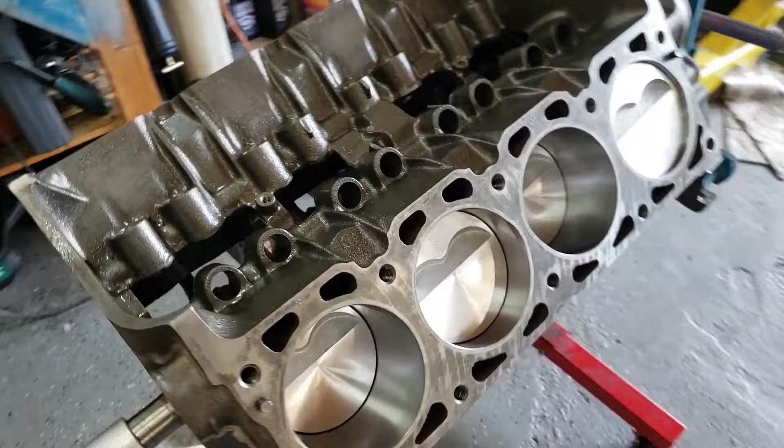Today we got Bonnie on the lift and we're going to do a few modifications. Maybe you've noticed on our Facebook page, we've been racing the Bonneville. We've been bracket racing it and it's very consistently slow, but it's very consistent. It basically runs about 18 flat in the quarter mile at 75, 76 miles an hour.

Like I stated before, it looks like it's got 2.41 rear gears based on just some crude math of turning the drive shaft. It does have that Metric 200 3-speed automatic in it. And I mean, the car runs really good. It's very consistent. It's actually won the free bracket race on ladies' night on a Wednesday, guys against girls. It's been to the semifinal round several times on a Wednesday night.

It sucks because I kind of haven't really raced the Trans Am lately. Not that there's anything wrong with the Trans Am, it's so much fun running the Bonneville right now, and it's just a no-brainer. But don't worry, the Trans Am will be out at the drag strip shortly. We've got some other mods planned for that.

But anyway, what we're doing with the Bonneville today, the car didn't have any kind of gauges in it, so I do want to put an oil pressure gauge and a coolant temp gauge in it just for peace of mind, see what's going on with the car. Second thing is that we did change the exhaust. We removed the stock catalytic converter and put on the homemade exhaust out of spare parts that I had laying around. One of them being a 2.5-inch MagnaFlow muffler.

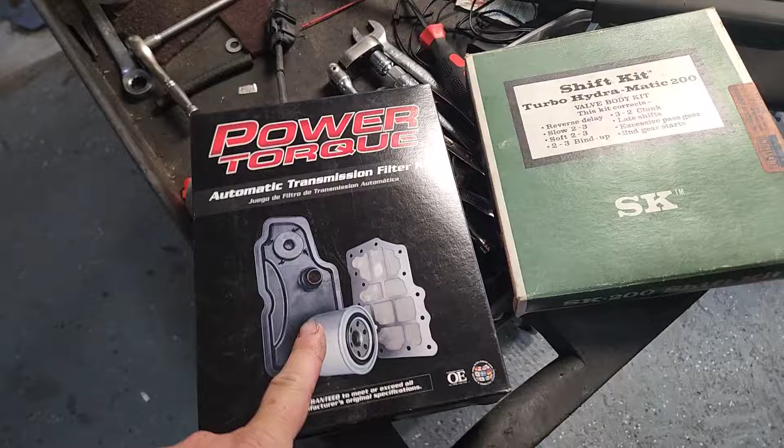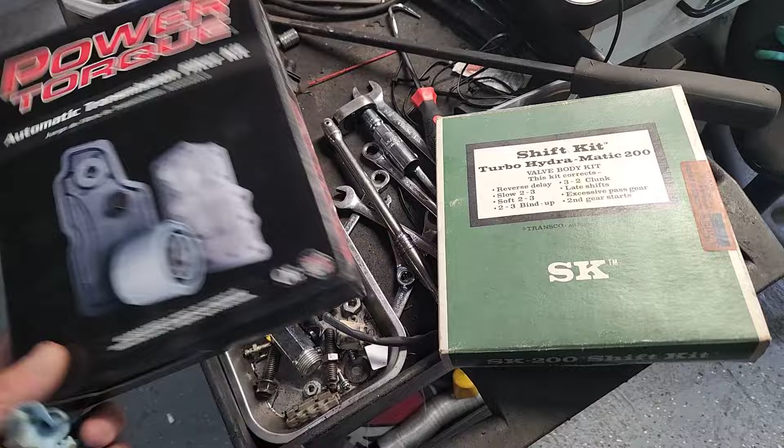So this is what I picked up. This was from my local auto parts store. Actually, they didn't have one, and their warehouse didn't have one either. They actually had sourced this from another store to get it, but this is just basically a filter and a pan gasket. And then this is what I bought off of eBay.

This is a Turbo Hydramatic 200 valve body kit, and these are the things that it corrects. It's made by Transgo. I like Transgo stuff. I like their stuff as far as shift kits and valve body recalibration kits and stuff like that. I don't even know what it says here. What does that say? Oh, just Lemco. Cleveland, Ohio. Must be where it was made, I'm assuming.

Fits 76 to 78 THM 200, Turbo Hydramatic 200. The reason I wanted this one specifically, 76 to 78, is because in 1979 the Metric transmission got a lockup torque converter, and I wasn't sure if it would be the same. This one being a 77 is a non-lockup. I didn't know if a kit specifically for a lockup would work in a non-lockup trans. So that's why I went with this.

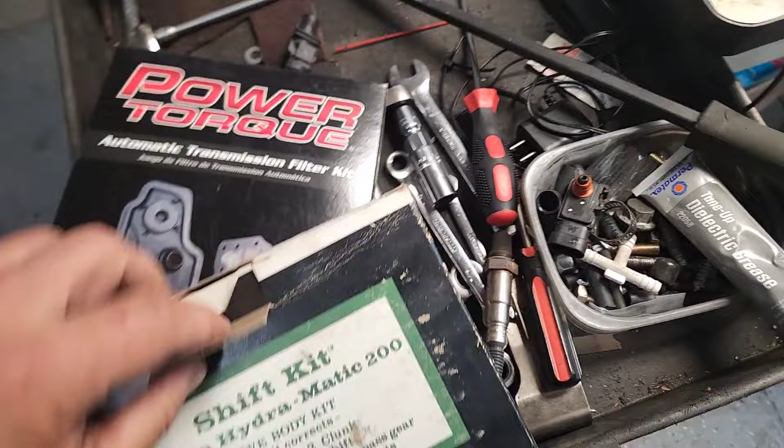And then it has parts inside of it. It's pretty old school. Oh, there's a separator plate. So yeah, the valve body is going to be coming out. So let's see what we got underneath here.

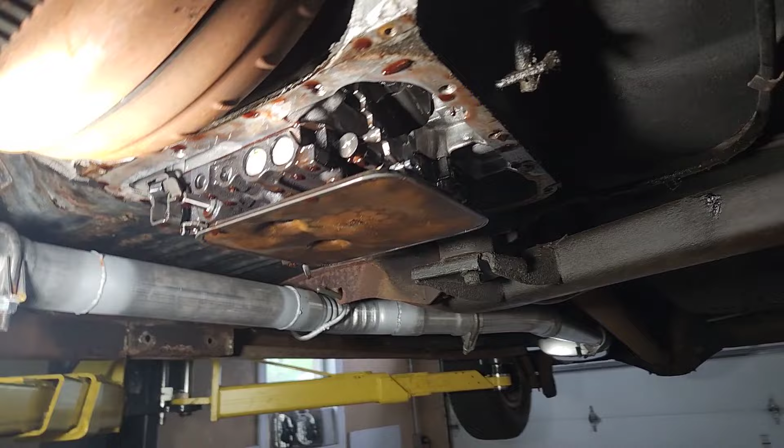So I got the pan off, and I have a suspicion that maybe this fluid was never changed. I mean, the car's only got 52,000 miles on it. Little bit of material on the filter, but not bad. Fluid was not bad, wasn't burned or anything like that. The pan itself, there is a little material on the bottom there.

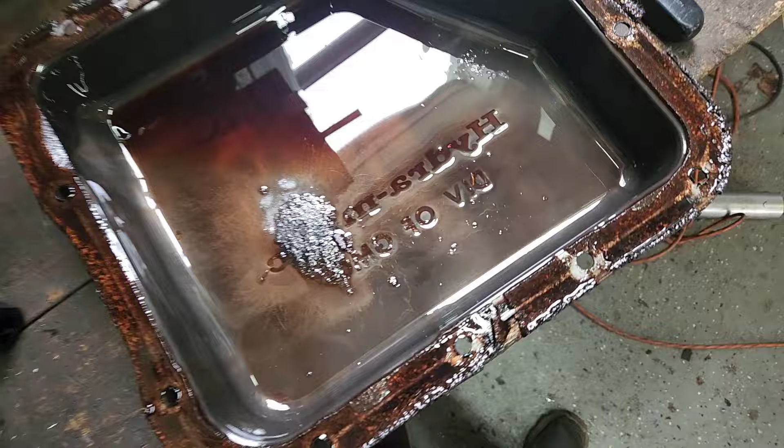Hopefully everything is going to be okay, because these Metrics are known for, I believe, burning out the reverse band and then they don't want to back up. But this one's been shifting just fine. It's not the firmest thing in the world to shift. With me racing the car, even though we're not making a ton of power, I still wanted to try to save the transmission from any kind of complete destruction.

And I do have another Metric trans just in case that's got 56,000 miles, but it is an 81 that has a lockup converter. So I do have a backup. Usually a Turbo 350 bolts right into place. It is pretty much a direct swap for a Metric, but I don't really want to go there if I don't have to.

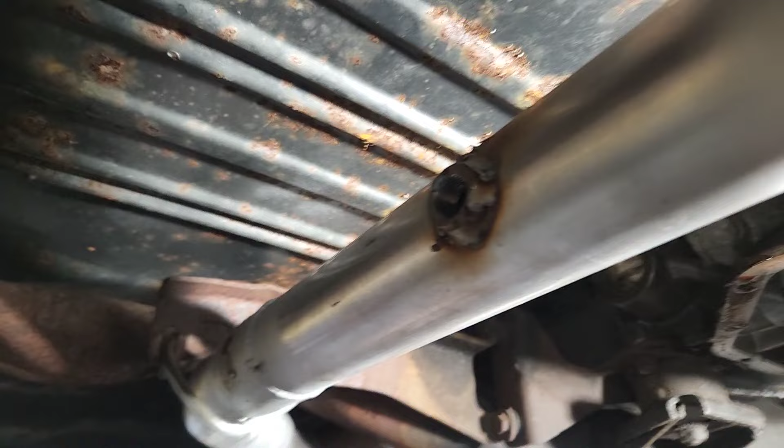So as you can see, we got the exhaust right there. We did put an oxygen sensor bung in it just now. We still have to screw in the oxygen sensor. And of course the awesome MagnaFlow muffler that is prettier than the car. All right, let's get to work. We'll get this valve body down and we'll see what's involved with this kit.

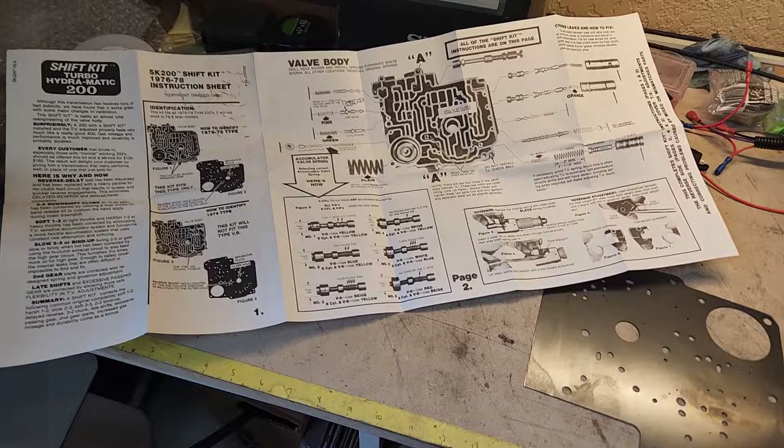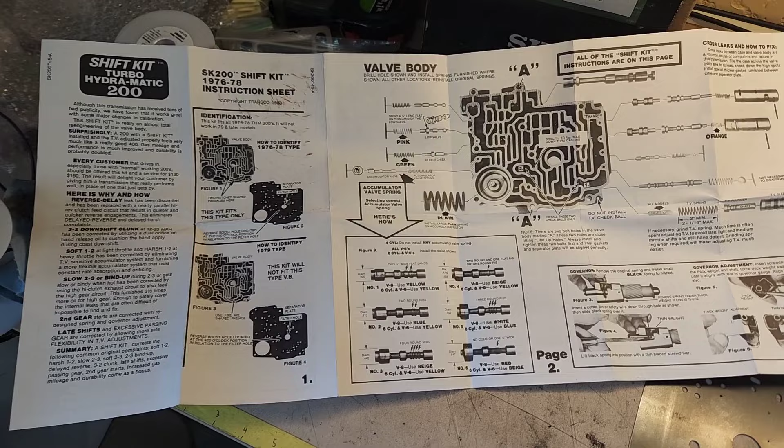Okay, kit is opened up. This is pretty interesting. There's a lot of parts in here. We got a lot of springs, mainly this bag full of springs. And we've got the separator plate, and the gaskets for it here. And then the instructions. I think I saw a date of 1980. Oh, right, copyright is 1983.

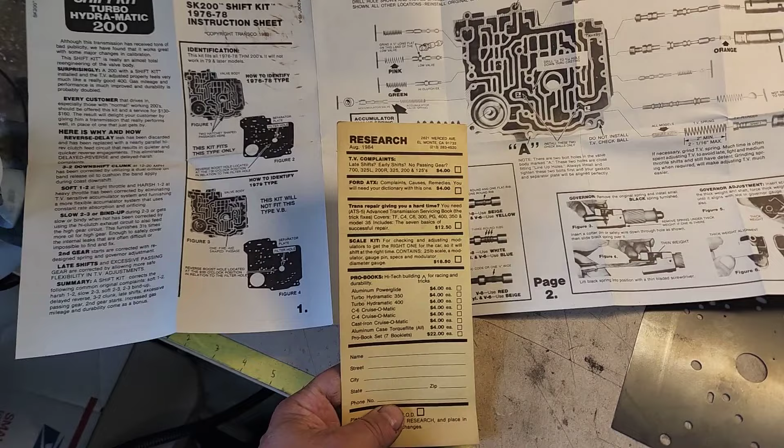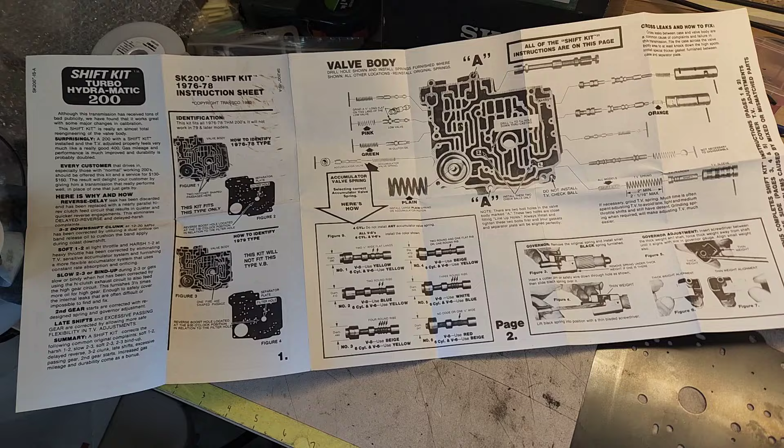And we got this note, Straight Talk from Gil Younger, Mr. Shift. Gil, hope you're right. We're gonna try this out. And there was some other stuff, I guess you could send in for some books, it looks like. And this is dated August of 1984. So, vintage stuff here. I think they still make this kit, SK200 kit. But I bet you the instructions haven't changed.

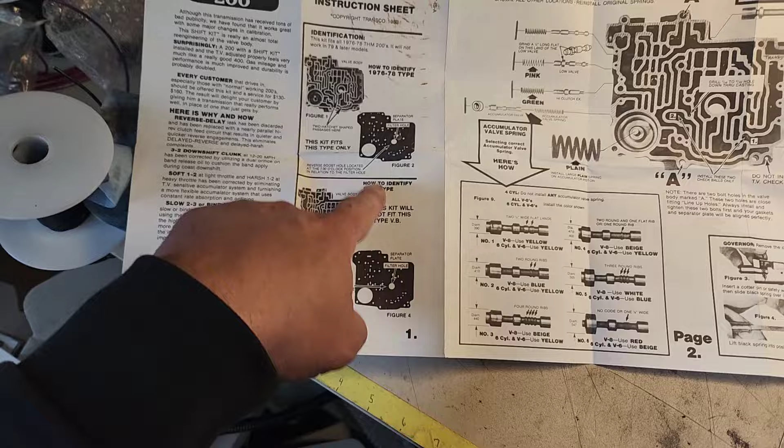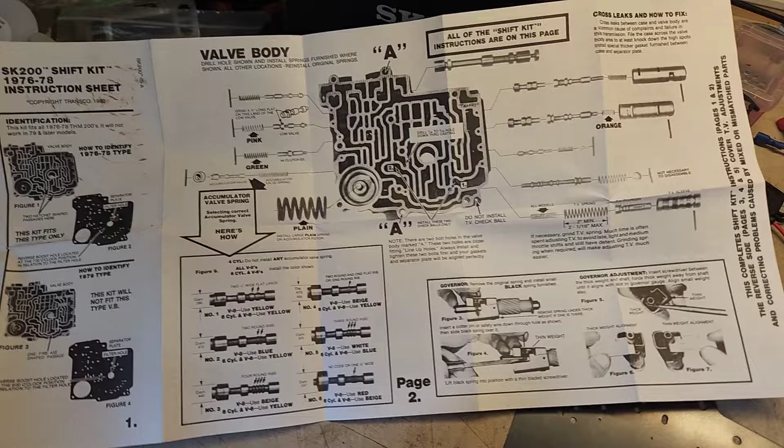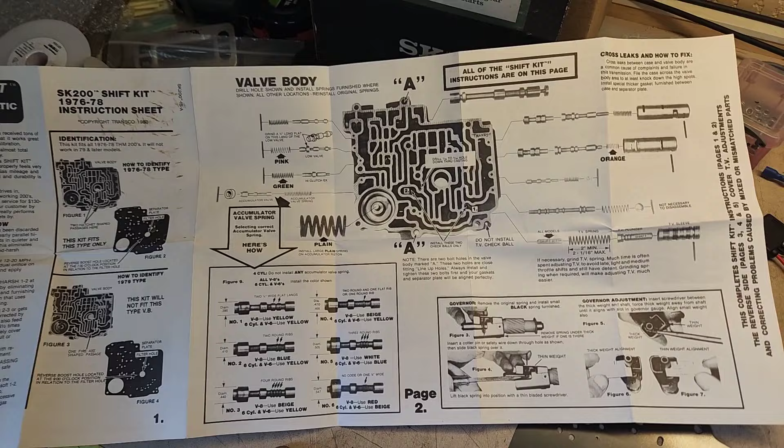So, we're going to read through all of this. You got some identification here between 79 and pre-79. If it's this type only. Okay, well, that's good. That's why I bought this one. And, oh, we got an accumulator spring to change out. There might be some options in here, but basically all of the shift kit instructions are on this page. There's some troubleshooting on the back side in case you run into some trouble. Oh, wow, they're even doing governor modifications? I have to check that out.

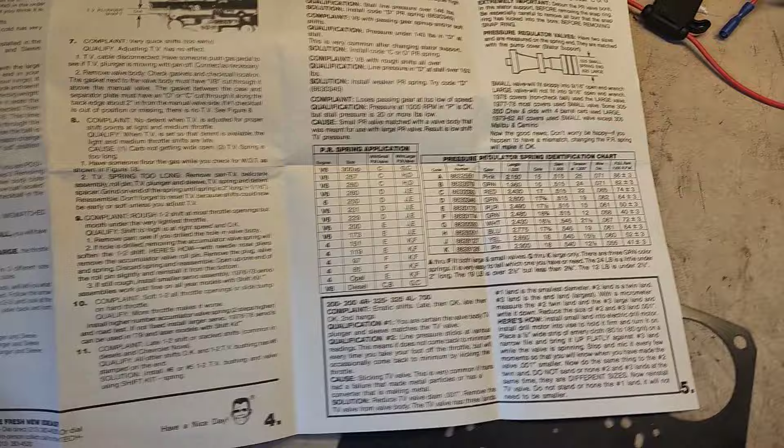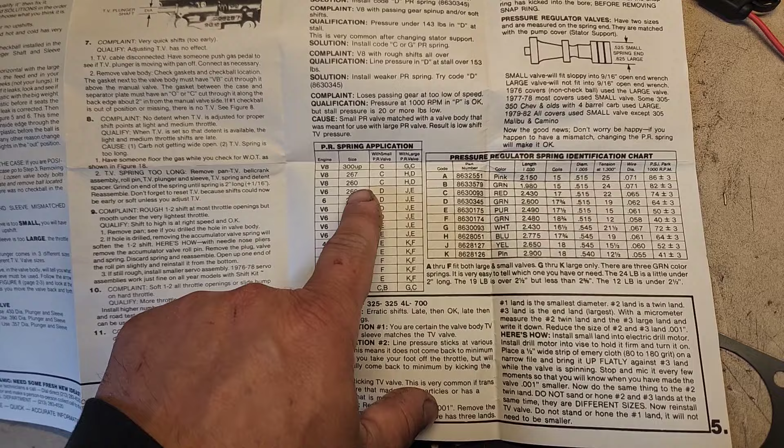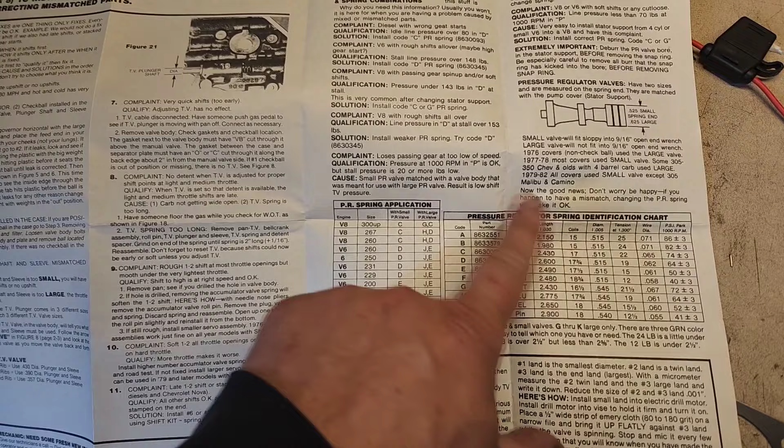I did see this, I thought was interesting. There was this pressure regulator spring application chart. And it's like 300 and up, size of what? Oh, it must be the engine. Well, I guess it's 300 and up. It's 301. That's more than 300, right? But yeah, it's pretty interesting. Okay, I'm going to read through all this, and then we're going to figure out what mods we're making.

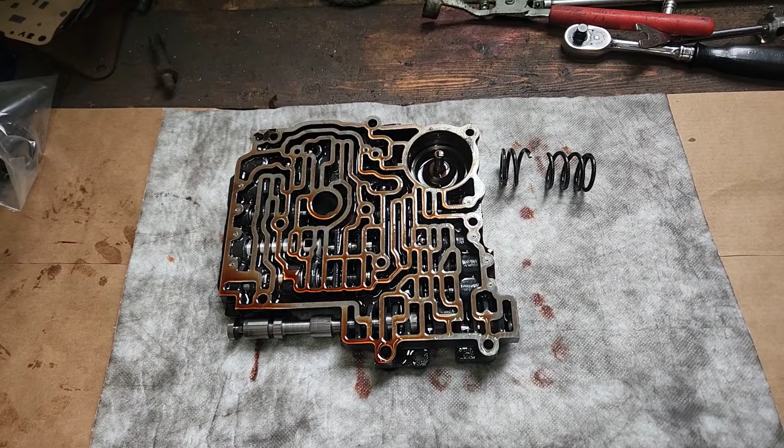Well, valve body down, ran into the first issue. It's not really an issue, but something that we found. Broken accumulator spring. Yeah, I don't know what kind of damage that would have caused as far as the transmission. I don't know if that's a common thing that happens with the Metric, and that's why it has problems.

I always noticed that the shifting wasn't firm, but like part throttle shifting, it was a weird overlapping shift. I shouldn't say overlapping. It had a weird engagement. It's like you felt it shift and then it fully engaged. Now, if you were on the throttle harder, you didn't really notice it. But the part throttle stuff, it was just odd. The 1-2 shift was just odd. And I wonder if that's why it was doing that.

Usually I would think an accumulator is for the 1-2 shift, but usually if you take the spring out, I thought it shifts firmer, but could be wrong. But yeah, that was one thing. I'm kind of glad I took it apart now and decided to put this kit in there because that could be a problem. But all right, let's start diving into it.

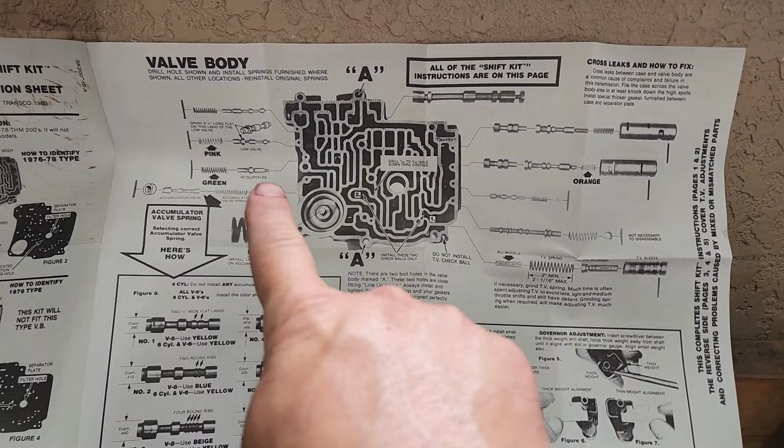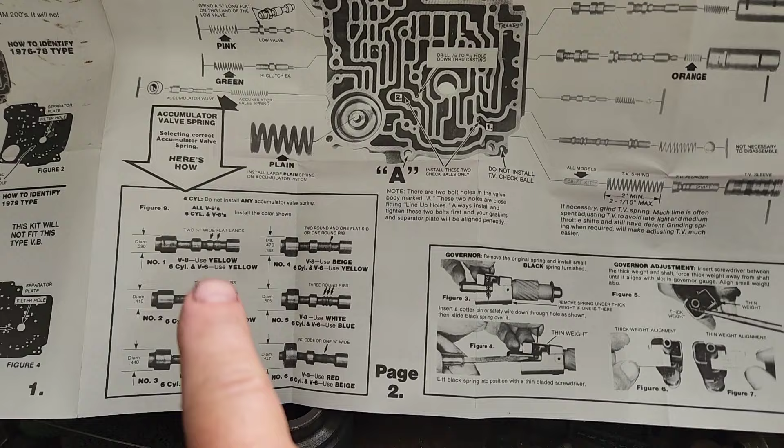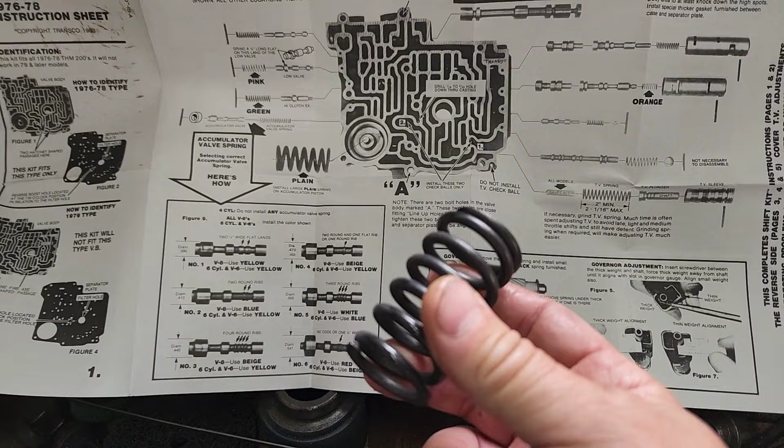All right, according to the instructions, it looks like the only thing we have to do is change that spring, this one to the orange. When we get to this accumulator valve spring, then we got to measure what diameter it is, look at how many different marks there are, and it'll tell us what spring to use. There's also these governor modifications, and then there's this spacer in here. And then this accumulator piston, the spring for that is massive. This is way bigger and thicker than what it came with, so that's, I guess, a good thing.

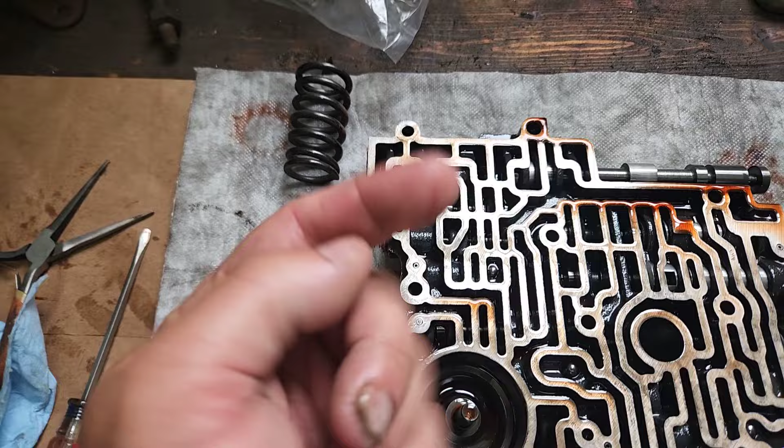We have the valve body kind of laid out right now, and this pink spring is getting replaced. There's all these little roll pins that pop from the bottom. You push them up through the bottom. Obviously, they can't come out when it's bolted into the transmission, but you pull the roll pin out and then knock out the spring. The spring will come out. Like right now, I'm putting the pink spring in the low valve, they call it.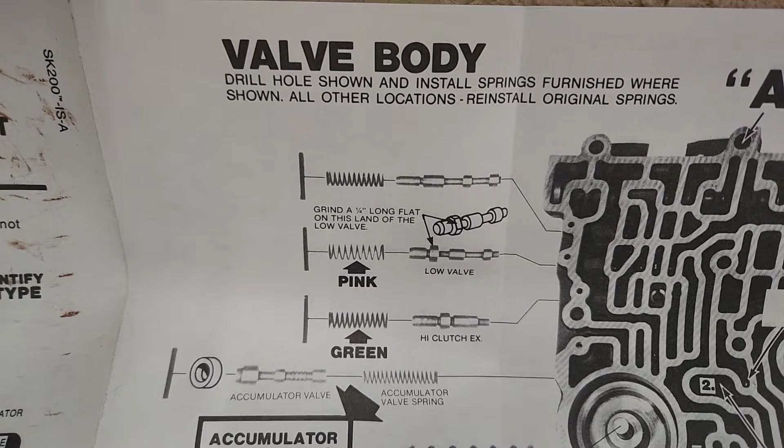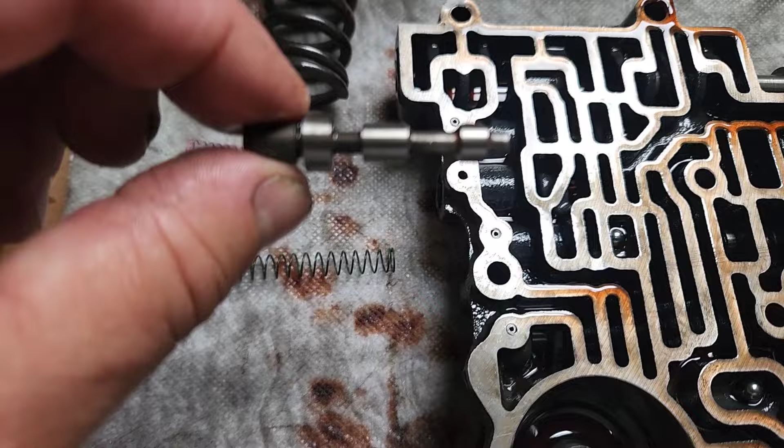Oh, there's also a note on that one that says, grind a 1/4 inch long flat on this land of the low valve. Okay, I guess we're doing that. We'll have to take out the low valve. This yellow spring is the one that came in it, so I don't want to mix that up. But let's see if we can get this out. So take this out. Ta-da. It says grind a flat on there. Well, I guess I'll go do that.

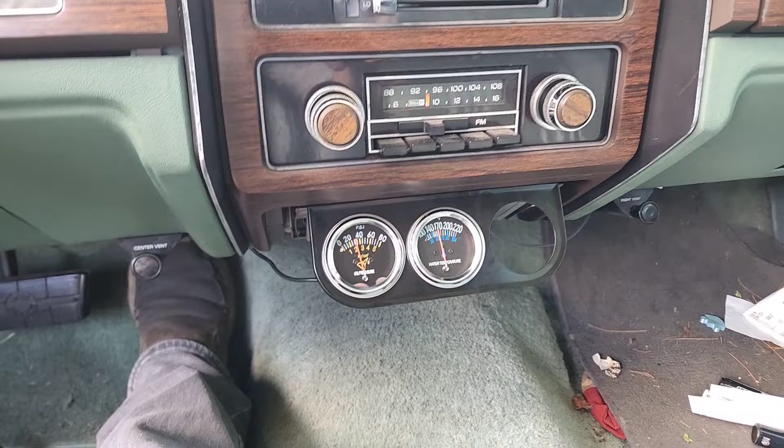All right, got it all warmed up, got the gauges put in. Oil pressure is actually pretty good. When it's cold, it was over 60. It's fully warmed up right now. It looks like low idle, we got like 30. Holding 170 pretty easily on the coolant temp. We're gonna take it for a ride. We're gonna see how it does for the shifting.

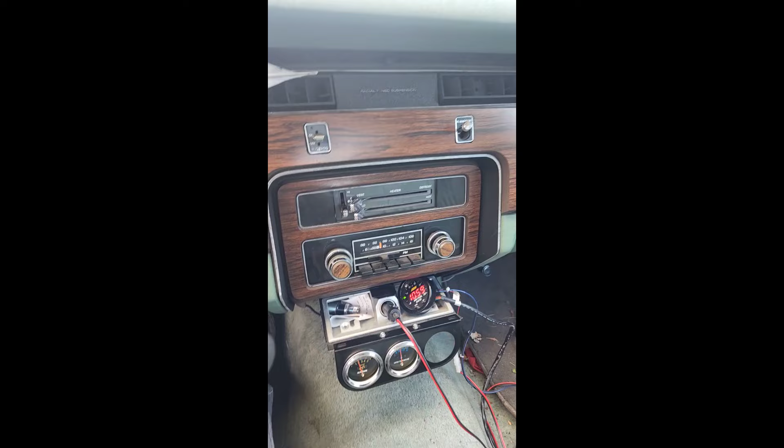All right, yes, we added the oxygen sensor, so we got a wide band, and it idles really stupid rich. But shifting, well, not harsh. Shifting all gears. Yes, the windshield's still cracked. Yeah, let's see. We get a little bit of the downshift.

Yeah, it's not a shift kit. It's not like it's shifting really hard. It's just positive. Before I had a weird kind of, I don't know if I'd call it a flare, not a full engagement on the 1-2 at half throttle. Now it's just like, yep, it's in gear. You know it's in gear, but it's not banging the gear trying to chirp tires or anything.

What are we cruising at, air fuel wise? 14s, mid 14s, just cruising. That's good. Even in the high 15s. Okay. Just got to take care of that idle. Let's see. We're gonna hang a U-turn here. There we go. Wide open throttle upshift. Feels about the same. Yeah, really, it hasn't really changed.